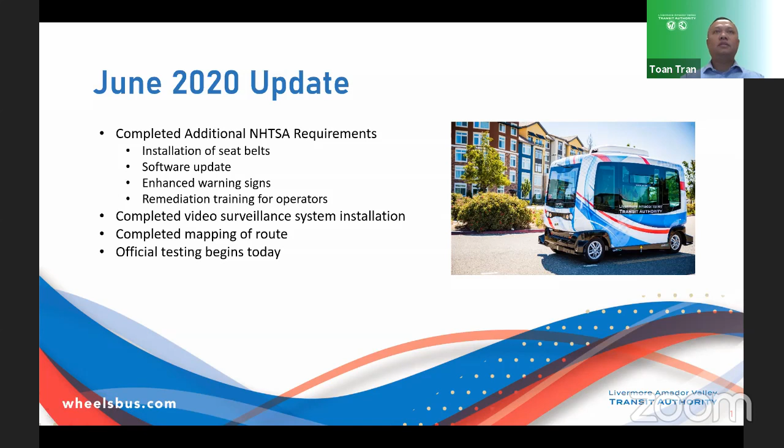Can you all see the slide? Yep. Okay. So as you recall, as a result of an incident in Columbus, Ohio earlier this year, NHTSA suspended all US AV testing involving an EasyMile vehicle. So in order to lift the suspension, additional safety measures have to be put in place. These safety measures include installation of seatbelts, software update, enhanced warning signs, and remediation training for operators. All those efforts were completed last week, as well as the installation of the video surveillance system and the mapping of the route. So we have really good news. Testing actually started today, and I have a short clip of the vehicle in action from last Friday.

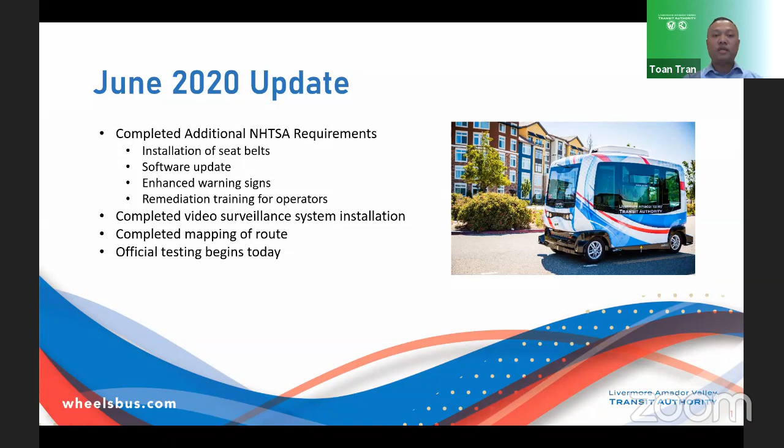Not sure why it's not playing. It played earlier. Says something about QuickTime. Yeah. Jennifer, can you try on your computer? Toan, can you send us that file? Sure. Jennifer, are you on? Yeah, she's with me right now. We played it earlier. It was fun. Yeah, so I'm not sure why it's not. I can try to do it on mine. Okay, try. This always happens. But it does move faster than that, right, Toan? It does, a little bit faster. No, I don't think it does, Jerry, to be honest with you. What are we doing? So Jennifer is going to try on her computer.

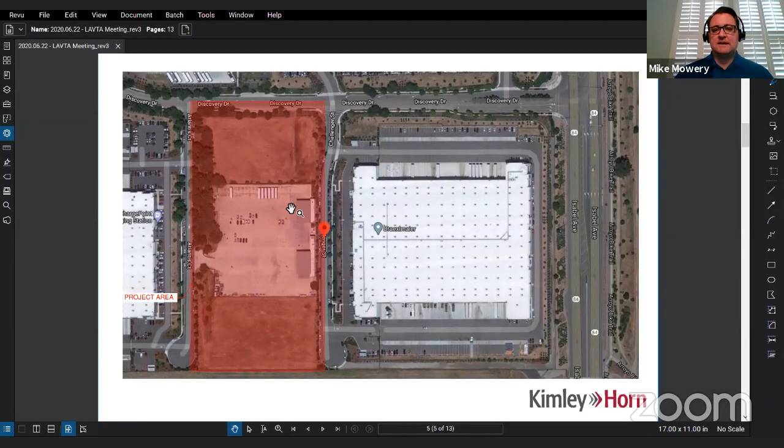So you'll see that here on this slide, we're generally maintaining that area. We are on some of the cut areas, hemming into that area in order to allow for development of the other two main areas. And I'll highlight those now.

So along Discovery Drive, there is an existing driveway. We do plan to use that for entry. Discovery Drive will be the front door to the site. This is where we're showing an administrative and operations building. And we'll go into the architecture of that with one of our team members here in a little bit.

This will also be where both the public and the employee parking will primarily live off of this access from Discovery Drive, including both accessible parking as well as some EV charging parking.

In the middle of the site, again, is the majority of the maintenance facility as it is today, along with some additional facility improvements, mostly striping, to incorporate some of the expanded service for LAVTA in the years to come. This access is currently existing today off Atlantis Court, and we intend to retain that access location.

And then at the back part of the site, if you think of it in thirds, it would be the new maintenance facility. This would have interior truck maintenance, bus maintenance for both the standard buses as well as articulated larger buses, and then some outdoor facilities as well.

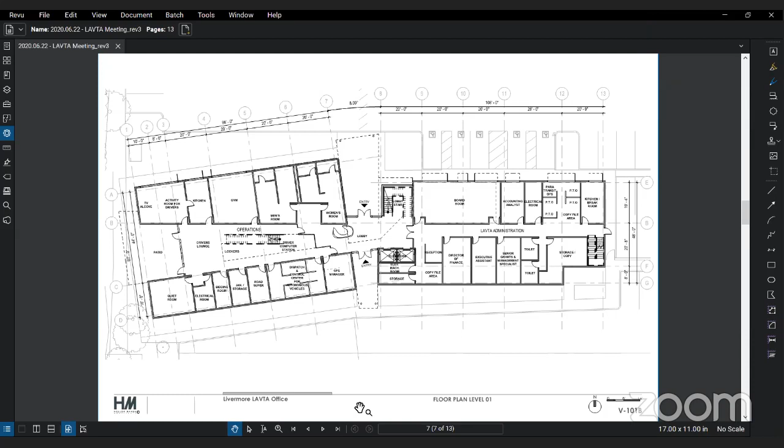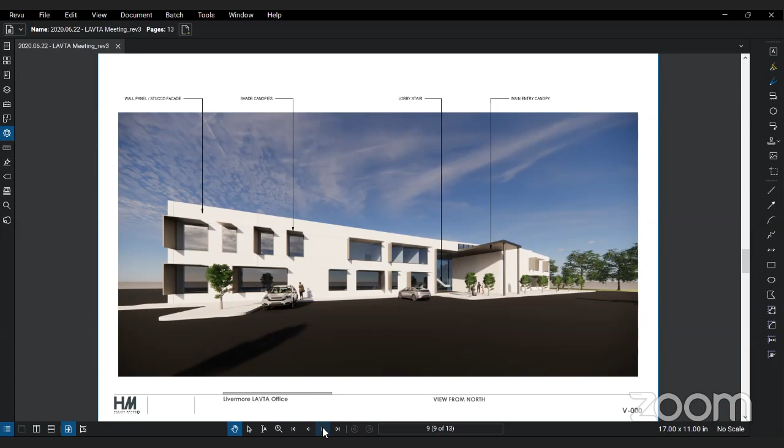Yeah, and so we do have a 3D illustration as well for the building. Oh, beautiful. So this was just a quick concept image. This is looking from the north at the main entrance, just to give a general idea of what it might look like, but it's very, very conceptual and early stage. Okay, anything else? That's it as far as the design. So, any questions? No questions? All right, you got lucky so far.

I raised my hand there, Scott. I have a question. Go ahead, Jerry. Yeah, in looking back at the design, it looks like it's really cut up into office spaces, and a lot of new architecture that I've seen in larger facilities has been an open environment architecture. Is there a reason why this is back to kind of old school offices? Going to Scott's point, it doesn't have the ability to expand for a COVID-related environment of being able to spread people out. It's really chopped up into smaller offices, so you wouldn't be able to react to that. Is there a reason why this was done, or is this just what it looked like in 2013? You're going to stay with that?

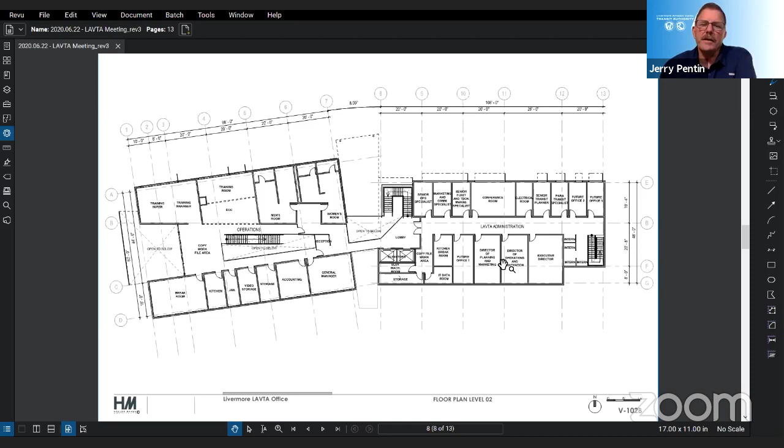For the LAVTA side, as we worked with LAVTA, I would say that there is a very specific set of staffing and director positions that require offices. We did, in an earlier plan, have a little bit more open layout for some of the senior level positions, but not director level positions, and it's transitioned to this layout, but we could incorporate some of that back into the set. Yeah, maybe Mike, an alternate plan to show more space in case of so on and so forth.

Yeah. Michael, you want to speak? Yeah, when you had mentioned what's the main difference, one of the key things is just space. Currently with the admin and the operations, you have 11,000 square feet here at Rutan. And in this design setup, you have 24,000 square feet. And then the maintenance, which I think we'll get into in a few seconds, was at 16,000 square feet currently at Rutan. And in this schematic, it goes to 31,000 square feet.

So there's a lot more square feet that we're working with here, which is one of the key things. We're on top of each other here. We've got interns in the copy room, and we've got buses being parked in maintenance bays and in the bus wash. We're just out of space here. So that was one of the key points we'd want to bring out, is that you basically get 100% more square footage with this design layout.

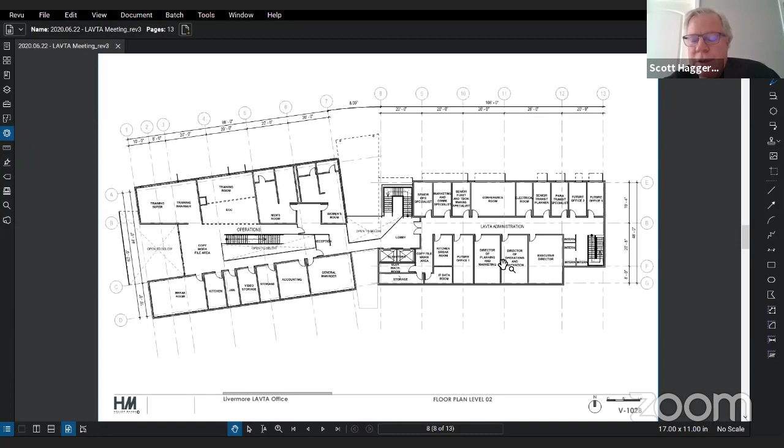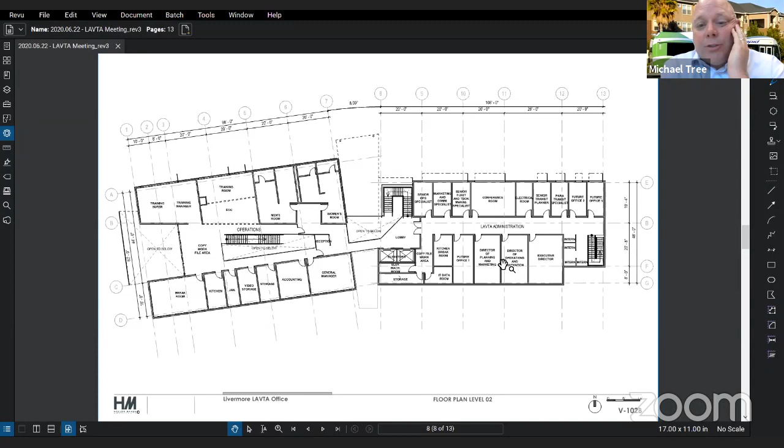And then on the agenda, you're requesting an additional $350,000. Is that for more detailed work at that point? Yeah, from the beginning, this has always been a design build project in the board's mind. And so we wanted to get it to 30% design, which is your basic jumping off point for getting a design build contract in place. And we felt with a potential stimulus infrastructure package coming out, if we could get it to 30% design, we could possibly have this as one of LAVTA's projects.

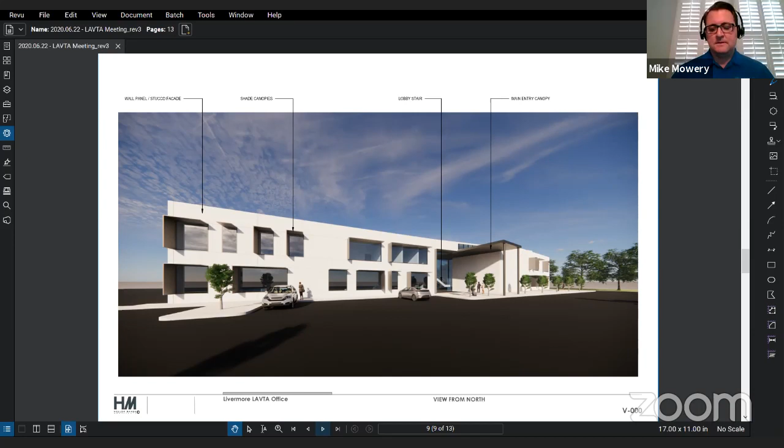John, are you related to Frank Imhoff? No, not that I know of. Can you hear me? That's good. Okay, go ahead. Yes. Okay.

So this is also oriented north at the top. As you mentioned, it's approximately 31,000 square feet right now. In the current plan, we made a few modifications to what was originally done. It has 10 repair bays. 6 of those bays are transit bus bays. We added 2 articulated bus bays, and then 2 spaces for SAVs. So the plan's pretty clearly organized.

Adjacent to the maintenance bays are the support rooms for the maintenance area. That's all part storage, shops, and supervisors' offices. And then completely separate to the west are the employee facilities. There are restrooms, lockers, a training facility, and a kitchen. So it's organized so that the employee functions are away from the work areas. And everything is connected by the central spine, a circulation bay that runs down the center. Can you go to the next image, Mike? Any questions about this part of it?

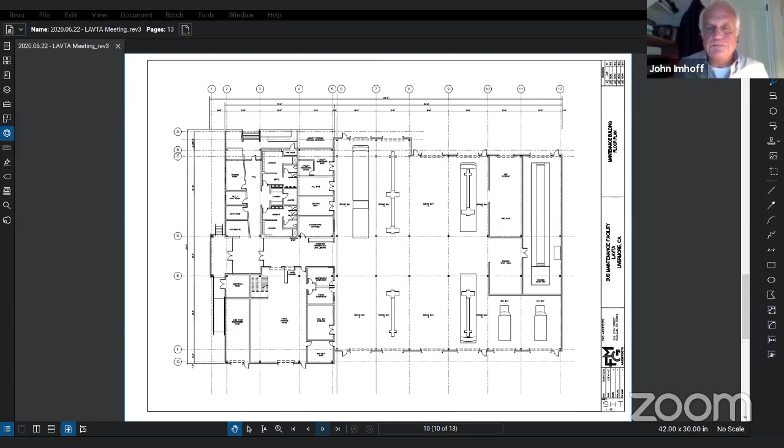And can you go to the next slide, Mike? Yes, I can. Thanks. So this is an image based on the original program that was produced by Gannett Fleming. You can see that there's a sloped roof over the employee and office area, which gives it a separate look. It's a lower building. And then there's a clerestory. Natural light comes in through a clerestory over that central circulation spine.

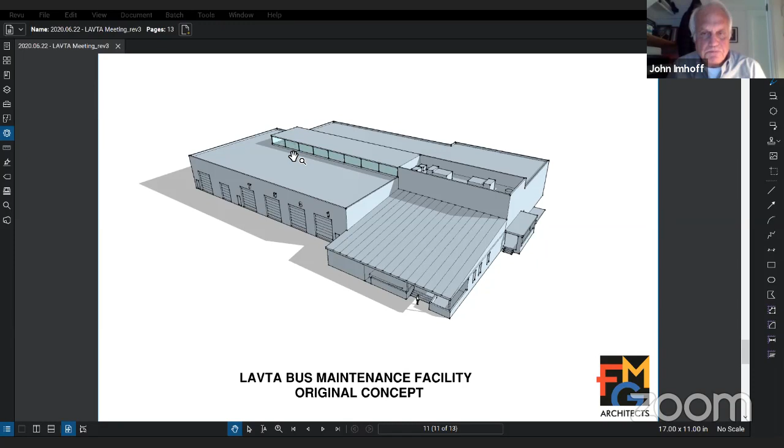So can you go to the next slide, Mike? This is an alternate concept that we came up with. In lieu of providing light that runs down through the middle of the building, we have continuous glazing that runs around the perimeter, letting much more natural light in. And you can see the office areas and the employee function area is broken out as a separate lower building.

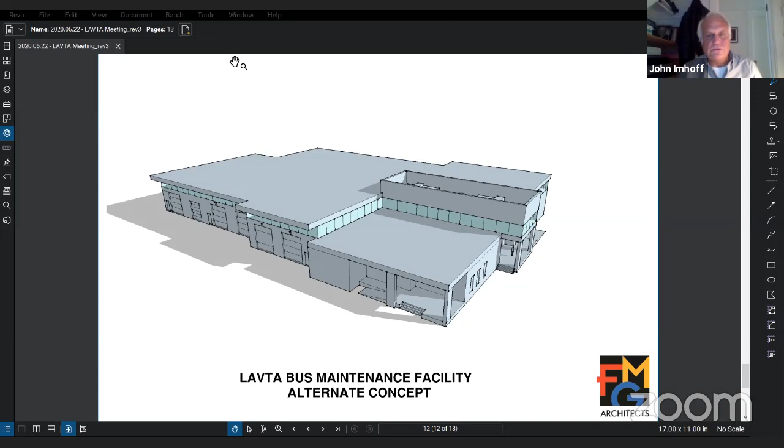John, sorry, I think the other thing, John, that you're going to note is that while this is just a massing study, this really becomes the front door of the facility. And so the treatment of this is the priority for the next phase. And then also the inclusion of the articulated bus bays, which would be here on this facade. Yes, and I also wanted to mention that the site is sloping 1/8 inch per foot across the entire site. So there's a difference in elevation at the entry of approximately 20 inches. We'll have to accommodate that during site development.

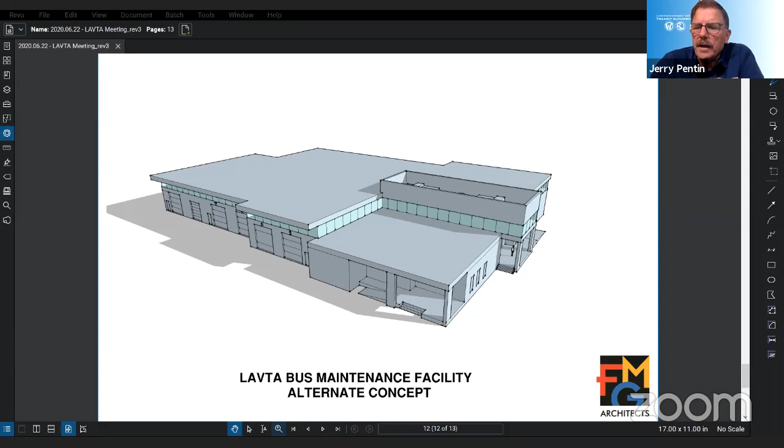So we end up with flat bays. Jerry Pentin has a question. Mr. Imhoff. Yeah, Jerry Pentin. Thank you, Scott. I just want to go back to Scott's question about charging. LAVTA will eventually be at a zero emission bus system by 2040. So we're building this building for longer use than the next 20 years. So would the charging take place inside this building, or would this parking lot between the two buildings be full of charging equipment, and would that be part of this design?

Just so you're clear, my question was, while a bus is being worked on, it may need to be charged. Right, okay. I'm not talking about when buses come in at night for charging. I would assume those are going to be in some sort of a solar canopy. Yeah. Well, I just wanted to confirm that's what the parking lot would look like.

Yes, so thank you for your question. We have talked with LAVTA staff about the main overnight charging function occurring in this area, which is really the overnight bus parking. We've started to talk about a solar array. We haven't fully decided on it yet. If we'd have those canopies, we want to be able to keep some of this sightline open, and also allow a little bit of a bus rodeo training activity out here. So positioning of a solar array to help with that charging, we're trying to find the right solution for. Okay, thanks.

So can I chime in real quick? Go ahead, Tom. So as Mike alluded to earlier, this is the initial phase of conceptual design. And we have Savannah Gupton here from CTE, who's currently on board to help us with the zero emission bus study. So our plan was to connect the two firms at a later time, when Kimley Horn entered into the second phase of the project, to work with CTE to determine an ideal layout to incorporate the zero emission vehicles later on. And that's why it's not in the current plan layout.

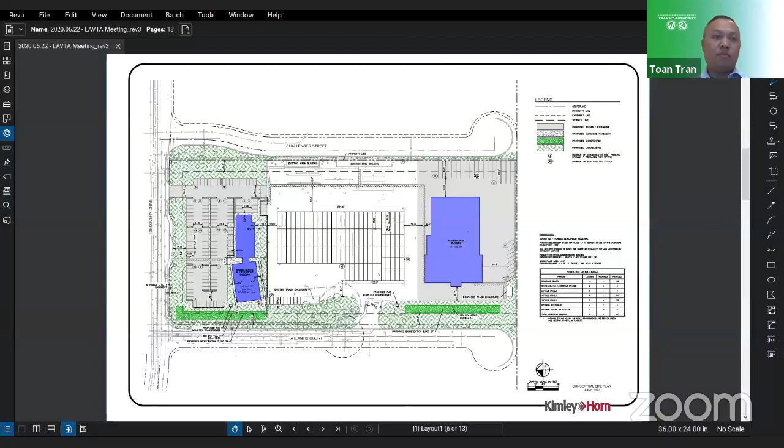Yeah, no, that's definitely being considered, because that's one of the questions that CTE raised recently. And we realized that there's not enough capacity here at the Rutan facility to convert to a 100% zero emission bus fleet. Okay.

Go ahead. Go ahead, Mr. Imhoff. I think that's all I have for now. All right. So just, sorry, if I could,

Chairman Haggerty. So as Toan said, we're currently in phase one, just wrapping up concepts. Again, you can see that we're early in the process. We have also done a topographic survey, which will help the entire design team in the next step of the design process to move towards that 30% bidding document phase. We will incorporate some of the comments we received from you today, and we are scheduled to present to many of you again at the board meeting on actually July 6th. I believe the staff packet is July 1st, which is what's shown on the screen.

And then in phase two, really the schematic design phase is when we'll do a lot more of the details, incorporating the comments we received from this group today, looking to have a draft version of that schematic design set in early August with final design sets and engineering estimate early September, along with what Director Michael Treat was saying about having this as a project going forward through grant funding or other exercises. Okay.

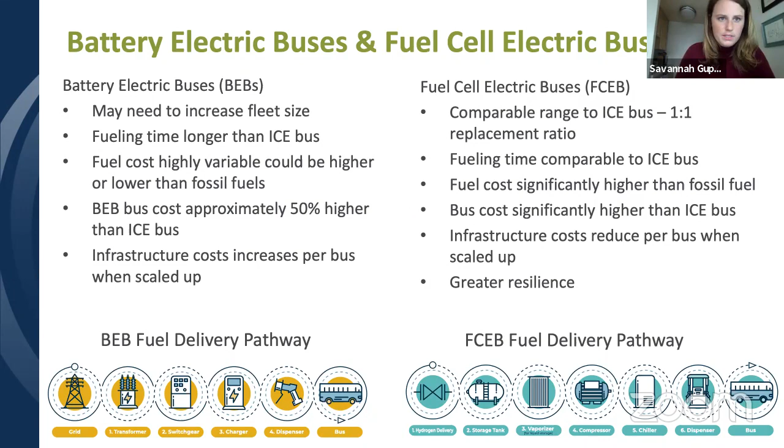The fueling time is comparable, but the fuel cost is significantly higher. That's related to the size of the hydrogen market. It's not as robust, but it is growing. And then the infrastructure costs I just mentioned, and then there's also greater resilience in relation to the grid. So just a 101 on the technologies.

So the real reason you all are endeavoring with us is that there's this Innovative Clean Transit regulation with CARB. And so for you all, a smaller agency, it's a little more relaxed. You have to submit your board-approved ZEB rollout plan by July 1st, 2023. So we're working on it well in advance. But a big thing to note is that you don't have to be 100% zero emission by 2040. It's a goal that you're zero emission by 2040. The only part that is a rule is the purchasing mandate. And so we have that broken down in the table.

The percentage of total new buses that you buy have to be corresponding: 25% of your purchases that year must be zero emission starting 2026 and onward. But you can see it ramps up pretty quickly. You go from 25% to 100 within 3 years. And then there are exemptions that exist for this purpose. So you can look into those. And if that's something you all are interested in, CTE does assess that for you.

And then a big thing to note is cutaway buses, motor coaches, and articulated buses are excluded because there is not a technology out there currently that has passed Altoona that can really support a transition of those vehicles.

The next thing, and this is a big part that's really interesting to you all, is actually what is CTE doing for you? So we start in the planning and initiation phase, and then we move into, this is where we are currently, the second block from the left, requirements analysis and data collection. So this is when we figure out how much energy we need to keep your fleet running.

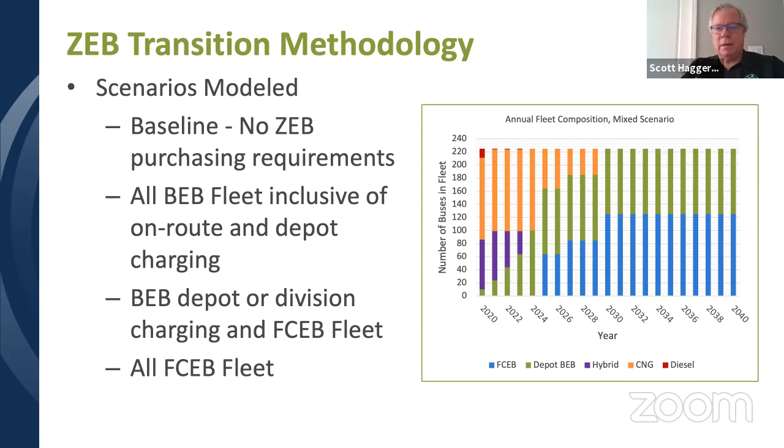So are there any other board member comments? I see none. I see nobody raising their hand. Bob, did you get back on? I did. My internet connection went unstable for a while. Okay, well, sure. So do you want to vote yes on item 6? Yes. Okay, was that a yes? Yes. Yes, okay, good. And then I've now lost some sort of screen action here too. So, Savannah. But I wanted to comment on. Hold on, Bob, hold on. Savannah, can you get us off the shared screen for a minute? Yes, absolutely. Okay, thank you.

Go ahead, Bob. Well, on what you were just talking about, this item and the other, I totally agree with you that making sure these two are coordinated. Also, there seems to be a lot of things uncertain now, as Jerry was talking about on the COVID and you as well. So it seems to me that, to the extent we can, we make sure we're making well-informed decisions. And I'm not sure what our schedule is, but if we have the time to find out more before we finalize and spend too much money, I think that's the right way to go. I also agree with you that one technology would be where we're going to go. I can't imagine it being two.

And then when would we make the decision as to which technology? Savannah, didn't you say you'd be back to us in 8 months? Did I hear that? That's kind of the end when we wrap it up. But what we do is we give you as much information as you all need to feel comfortable to take the decision, and just to remember that this is a living document and a projection. You're not marrying a technology with us. You know, we're not the vendor. So that's the other thing to keep in mind.

Well, if I understood all of this correctly, if we go to the fuel cells, we don't need all this charging stuff. That is correct. And so that's a key decision that has to be made before we build that other facility, right? And even design it and spend money on it. So that's why I want her involved now. I'm just completely agreeing with you. And what I'm wondering about is on the money we're spending on the previous project, are we losing anything by spending it too early relative to this other decision?